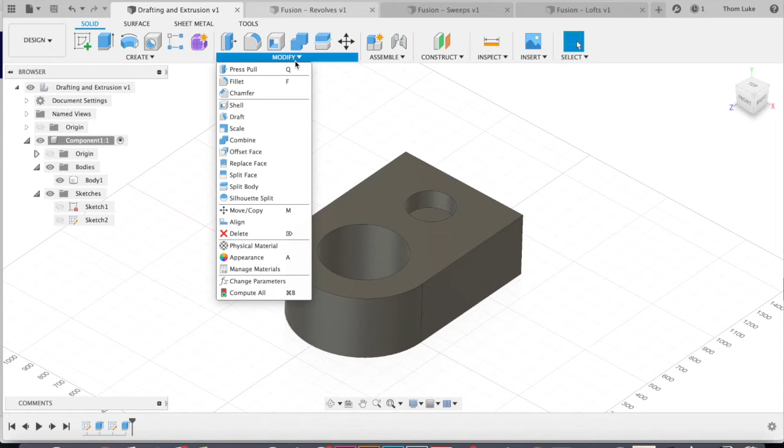In this tutorial, we're going to look at some of our modify functions. Note that I've come back to that initial extrusion project that we were playing with. So modifiers essentially act as a shortcut for when we need to modify our body, but we don't want to go through the rigmarole of drawing the sketch and then extruding or cutting.

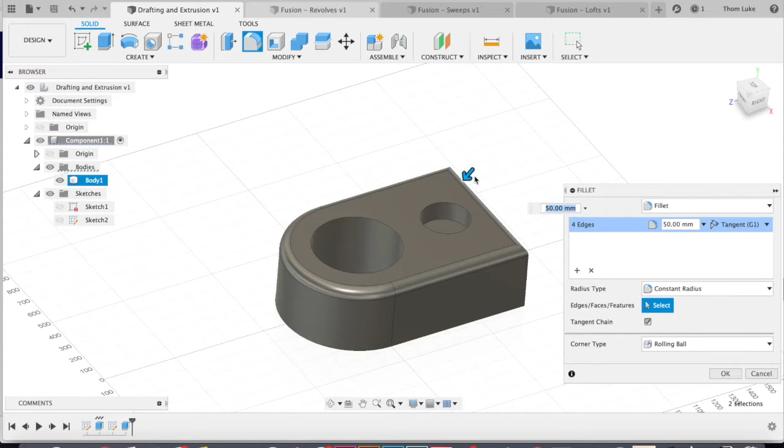So the most obvious one to start with is fillet. If I want to do a fillet, I can grab an edge, or I can grab a face, and I can adjust it here or with the arrow, and I can essentially create a rounded edge. So I'm taking away that sharpness and I'm rounding it over.

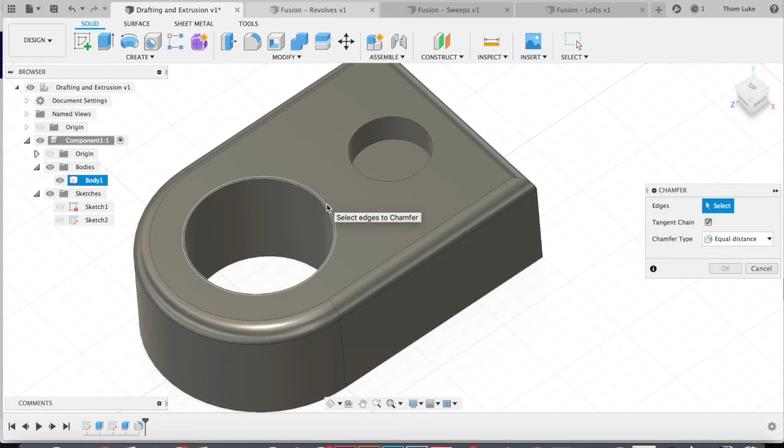Our next modifier that I want to look at is chamfer. By chamfering something, what it allows me to do is grab an edge, and I'm essentially putting a straight or a flat face on it. In this case, we're working on a curve, but we've still got that flat edge which is spun around it. Typically you would see it in a bolt with a countersunk hole.

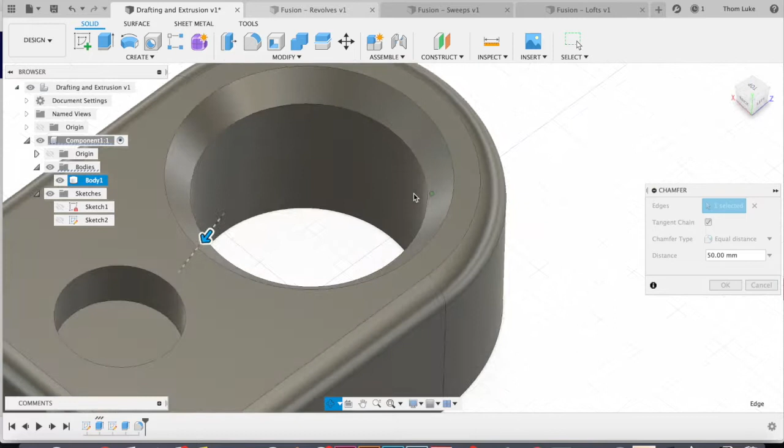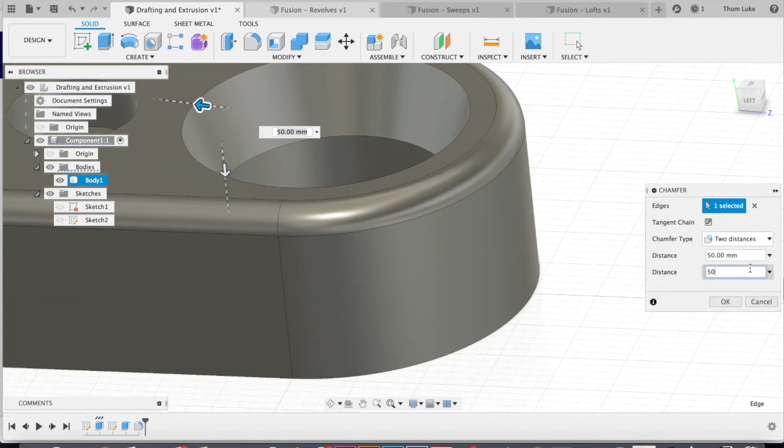Same thing, we can adjust the distance for how big the chamfer is. We can also adjust the way the chamfer works. Here it's an equal distance, but we can do two distances. So you can see it's becoming a steeper chamfer. Or you can go a distance and an angle to get a similar result. So that's fillets and chamfers, which are quite straightforward.

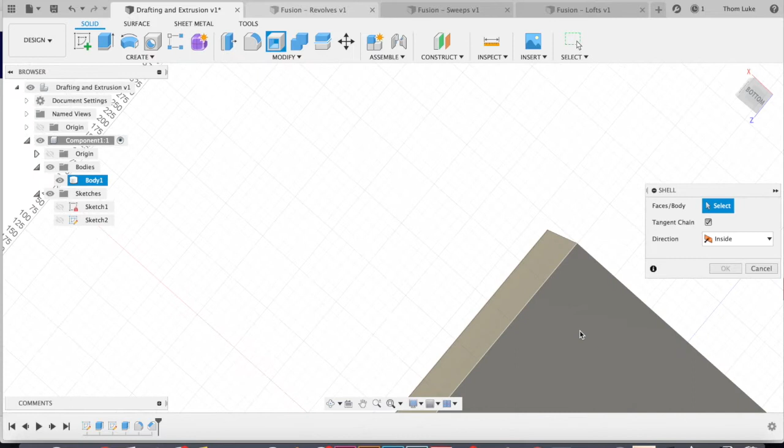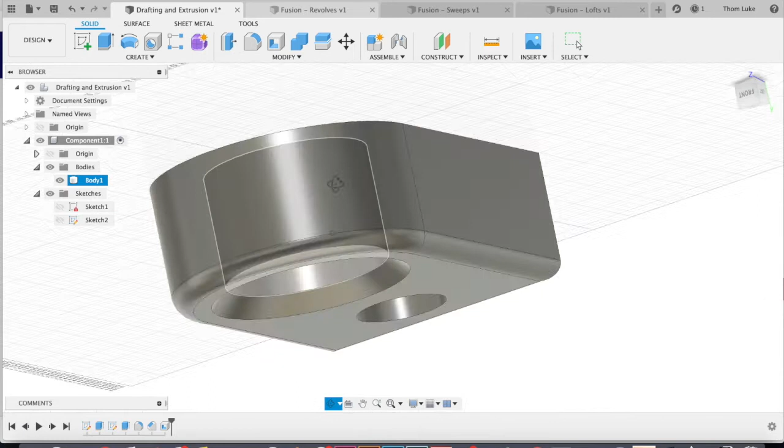The next thing that I want to show you, which is going to be really useful for 3D printing, is shelling. Shelling enables us to make an object hollow. In this case, I'm going to select the underside of the object, and you can see how by shelling the inside, and I have options to go outside or both, I have turned this from a solid body to a lightweight shelled body.

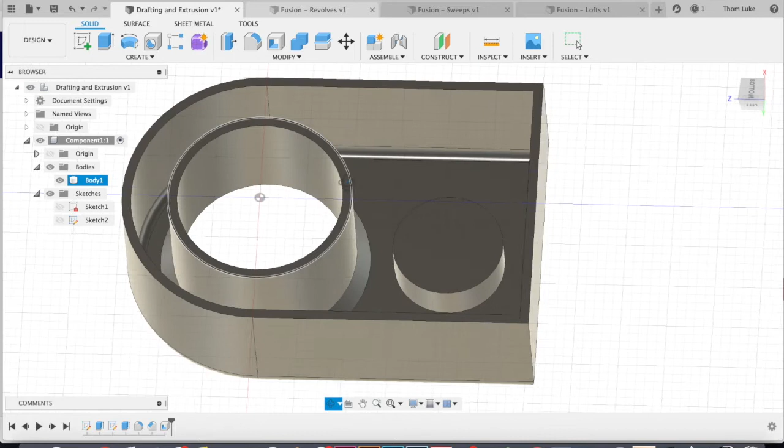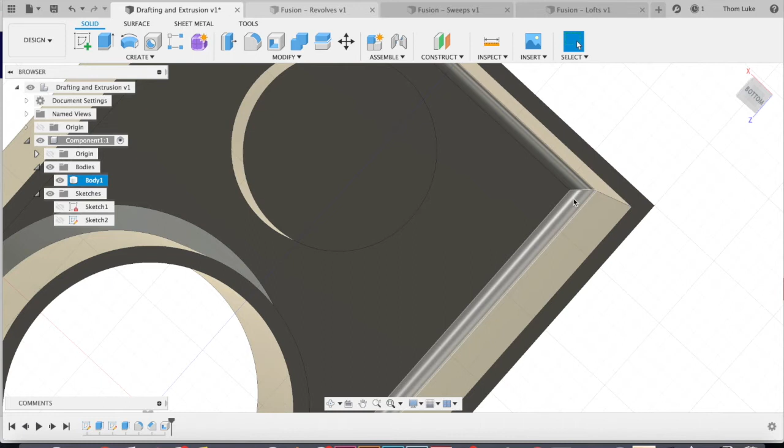When you're doing a lot of 3D printing, it's going to be quite important to think about these things, especially if you're making a casing for an object that you need to be able to fit other components into. You want to be able to shell. Thing to note, you'll see, is that the fillet on the outside and the chamfer on the outside is still reflected within here. Essentially what we're doing is we're offsetting all the geometry on the inside. So if we offset close enough, we'll see that geometry reflected on the inside of the object.

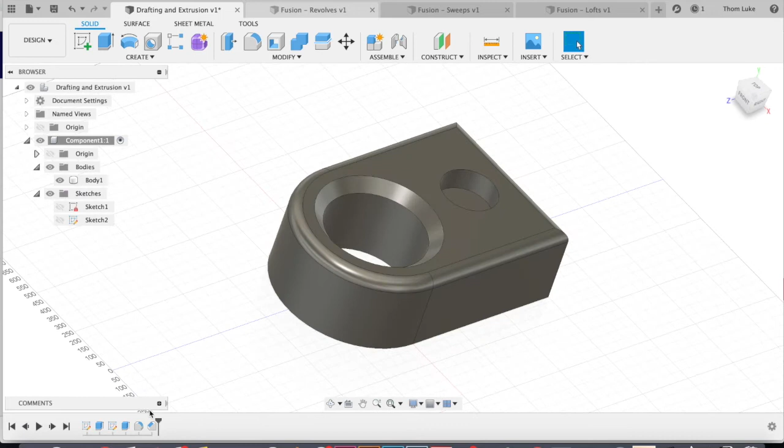What I'm going to do is I'm just going to delete that shell for the time being. You can see that our timeline is starting to build. I can come back and make edits and modifications. I'm actually going to remove the fillet as well.

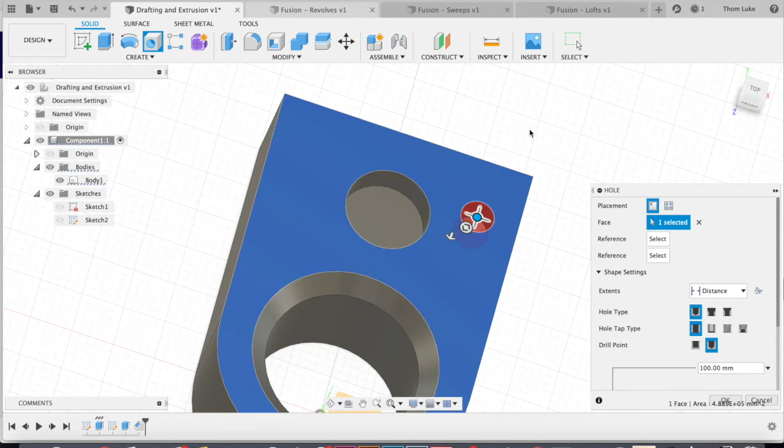Now, with my object here, this is looking good, but I want to create some holes. A really nice function in Fusion is the hole wizard. The hole wizard lets me click on a face. I'll go under the top view so I can see it a bit clearer. And I can set a location for a hole. The nice thing about it is it lets me operate and generate a range of different holes.

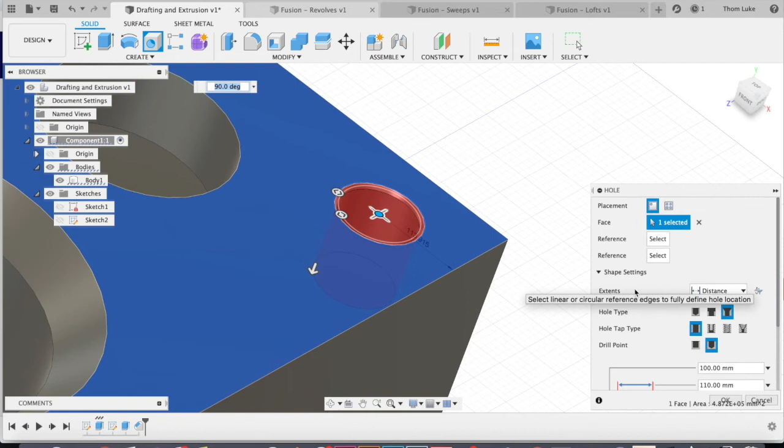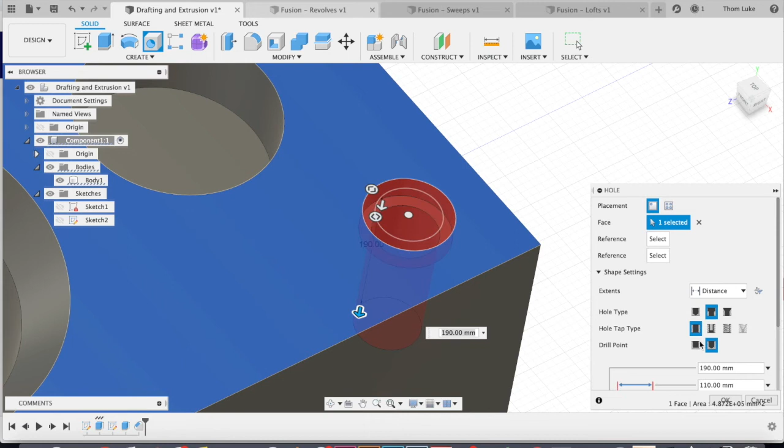So a counterbore hole, or a countersunk hole, and I also have the option just to do a simple hole. But also what's nice is I can tap these holes as well, so I can actually put a thread into that hole. You can see I have quite a well-resolved control metric where I can essentially enter exactly what size hole it is, what type of thread type, direction, before generating my hole.

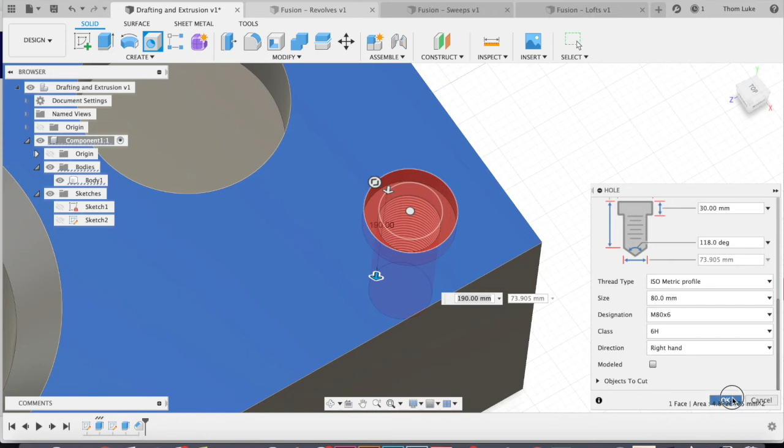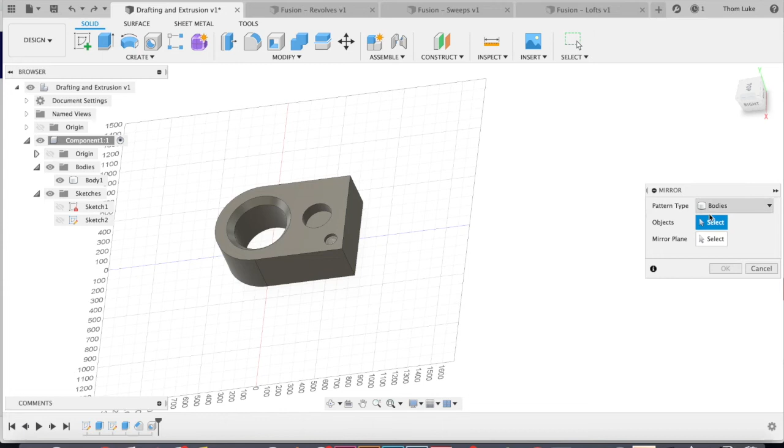Here, I'm going to have a go at creating a mirror. To do that, I'm going to select mirror. I want to make sure my pattern type is on bodies because I'm going to mirror the whole body. For my object, I'm just going to drag and select the whole object. And I'm going to create my mirror by selecting a mirror plane. In this case, I'm using a flat face of the object to mirror. I can also use a plane to mirror an object.

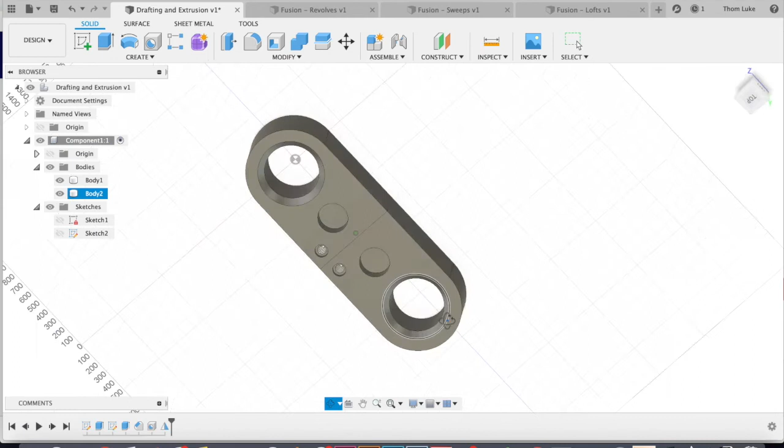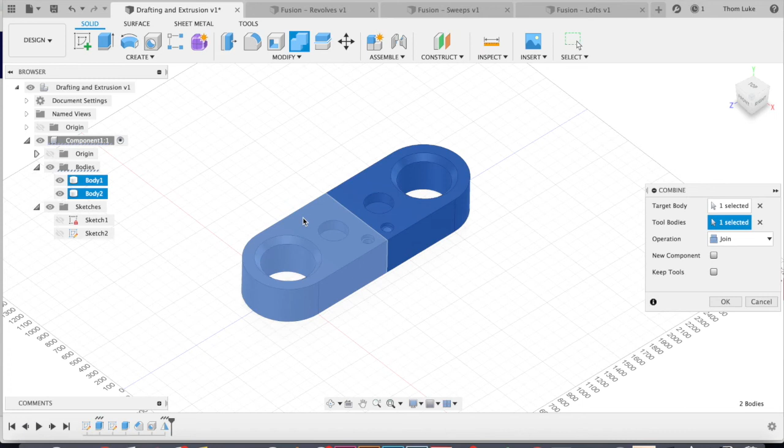And as you can see now, I've got two components. One thing to note is they're two separate bodies. So I've mirrored and I've got two separate bodies. If I wanted to, I can then go ahead and combine those two bodies. So I grab my target body, my tool body, you can see join, tell it to be a new component, and now we lose that line that's indicating that it's two separate components. Now we have one component.

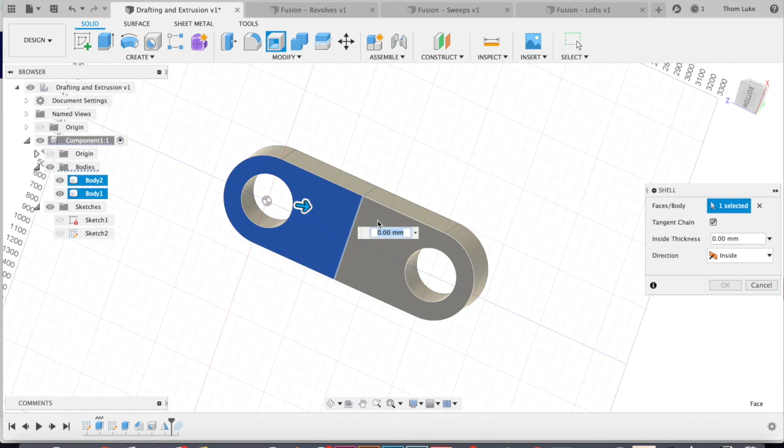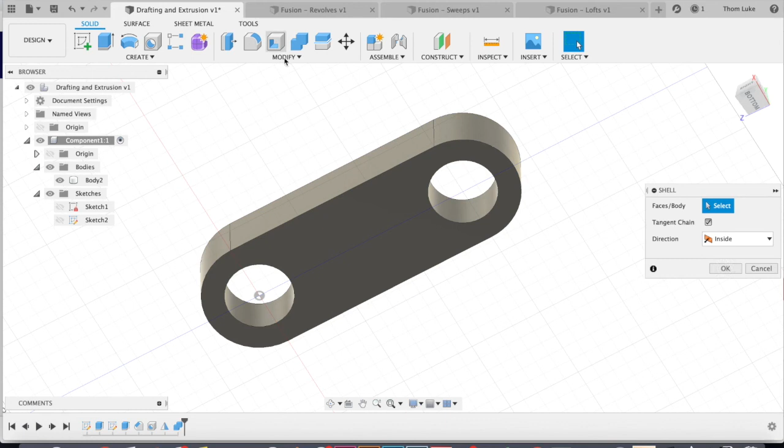We'll just take a step back for a second. It's two separate pieces. If I then go ahead and shell, you'll see that I've got two separate components that are just touching each other. When I roll forward and they're combined, if I do the same function and shell, it's one unified component.